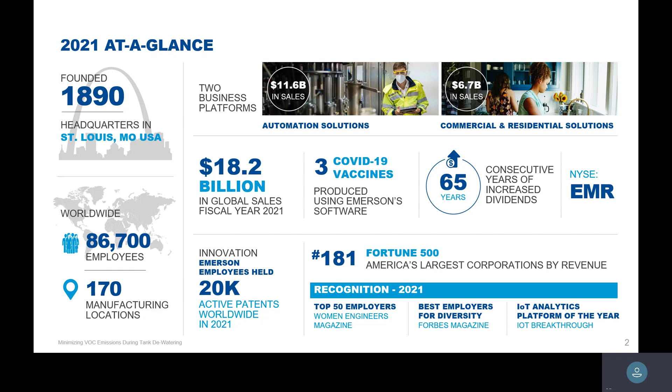So this has got a QR code, you get these slides if you want to go back. It's a real short clip, and it kind of gives you the idea of what we're focused on. The pillars we look at are greening of, greening by, and greening with. So it gives you an idea of who we are culturally, that's the goal here.

I wanted to include that because frequently in these cross-departmental engagements, I find that a room doesn't have a lot of knowledge of Emerson, when in fact your plants are probably very much full of Emerson content. It's just a different group of people that might be engaged at different times. So that's why the first couple of slides sit the way they are.

I'm Warren Merriman, business development manager for refining specifically, and my scope of responsibility is Canada and the United States. So roughly about 25 refineries across Canada and about 125 in the United States. Now, as we all know, those names change. Some become terminals, they move around a little bit, okay? They shut the doors on some, so they never pin down a number.

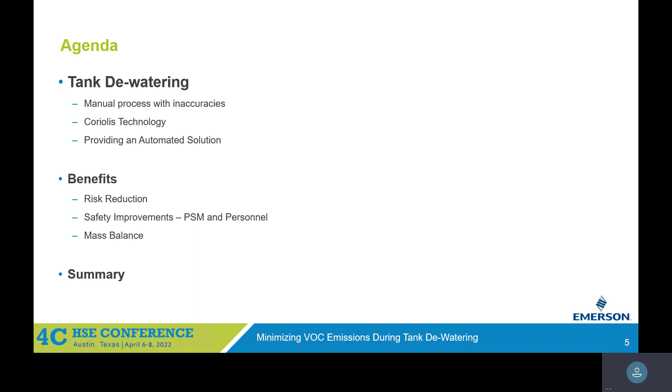And then we'll go over a little bit of the benefits, okay, and then we'll summarize real quick. So typically in the tank farm, we don't get a whole lot of investment. There are areas that have some risk and they get a lot of focus whenever an uh-oh happens. But there are some things that happen along the way that we need to be a little conscious of that might merit some investment, not only from a risk mitigation standpoint, but just from being a good corporate citizen taking care of the people there, and then the overall accounting within the facility tie-in as well.

So typically in a tank dewatering situation in a refinery space - and there are many more with regard to tanks, but I'll focus on that, that's the world we live in - you've got your storage tanks that are your hydrocarbon feedstocks, and we'll focus mainly on that while we're talking today. Then you have some intermediates, and then you have finished goods. As you go down that list, you also go down in the content of the water. So you're going to get most of your water up front when you're bringing your crude.

When you start processing and refining, that's your intermediates, you're going to start really getting rid of water. There's some ingress that happens, but you're reducing it a lot. And by the time you get to finished goods, I hope we're not shipping fuels with water.

That's why it kind of tiers down, and you'll see that the focus is really predominantly on the crude side as they're looking at the tank farm as a whole.

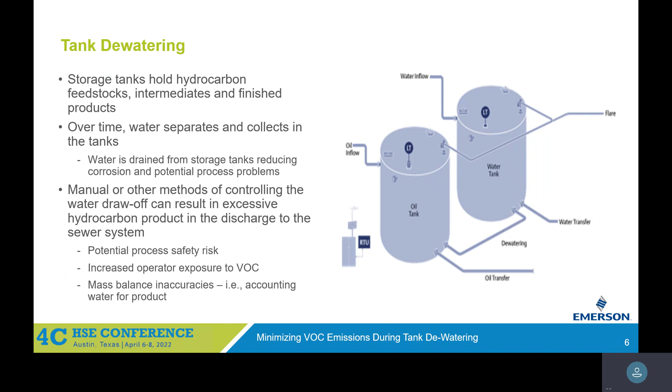So current operations, some of the challenges: you typically have got an operator going out manually until someone has found a reason to automate. I see a lot of them are still manual. It's not uncommon at all to see that someone's physically going out and pulling a draw, and there's just a valve there.

They're turning the valve until they think the water is gone, and then they close it out. Very common. And you get varying degrees of results depending on who the individual is that might be going out and doing it.

Now, this term here, naphtha, can you visualize what naphtha looks like? You ever seen naphtha in a glass jar? It's clear. Looks like water. Physically looks like water.

So when your operator goes out there and they have a piping that comes out and it drops into the drainage, they're frequently smelling for the hydrocarbon. Turn it on, don't smell anything. And all of a sudden I smell it, okay, close the valve. I've got to the bottom of the hydrocarbon, my water's gone, and I'm starting to flush out hydrocarbon. It's the olfactory, believe it or not.

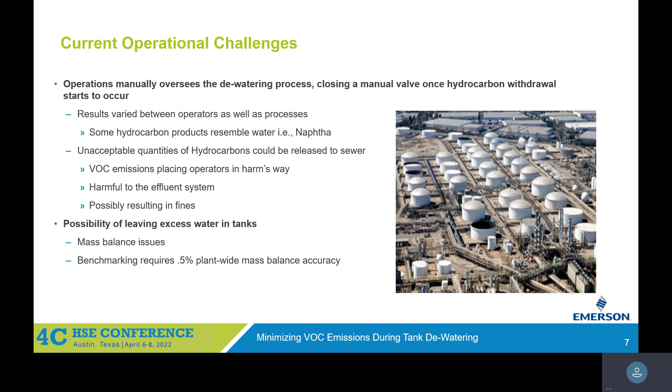So the solution that they came up with was, as you're looking at the tank, you have your overall oil that sits on the top, and then you have your water on the bottom, and this is where your draw might come out. Well, this little area right here of emulsion is where, when you have agitation, you don't have a good stratification or separation of the liquids.

So if I'm sitting here and I've got a manual valve and I'm waiting for some smells to change, I don't know if I've begun this or if I'm ending that in my tank. Okay. And I might get an increasing smell as I start working my way through the emulsion until I get a certain percentage or concentration that actually comes up and I smell it. But I'm physically looking at it if I'm standing there, right?

We talked a little bit about that risk. And I'm smelling for it. That's the gauge that you might see. So in the case that this client used, you look at this meter right here. It doesn't require any upstream or any downstream to be accurate. If you ever study flow measurement, those are some of the complications that you get whenever you're looking at the flow measurement technology solution.

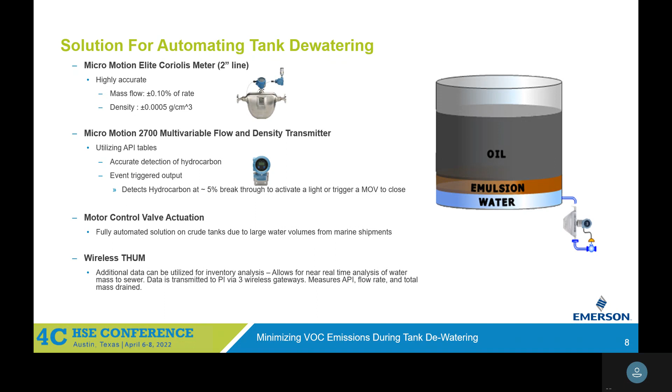Now, it may be hard to get an AFE approved and find the money to spend on your need, but in the greater good of what you're looking at, they're really not much. When you start cross-departmentally looking at the benefits, it becomes much easier for operations to say okay, this makes sense, because you're not coming at me with one solution. You're coming at me with a multitude of solutions, and that I will invest in. So just as you're thinking about the investment process.

So how does this little meter work? It's Coriolis, and you have the flow tube, as I mentioned before. So it comes in the flange, it moves through these tubes, and then out. That's how it physically works inside of the box that you can't see normally.

Then as you come over here with the transmitter, you have all these different outputs that you could get out of a transmitter. Normally your transmitter runs off a current signal, and you get one process variable. When you put a THUM and you include digital transformation, IIoT, or whatever it is that's allowing you access to money in your plants, okay.

This is how you instrument that to tie into all these other needs when you have a wireless infrastructure in your tank and you're limited to one wire of process variable information. You can open up all these other channels that serve different departments. It's very inexpensive to add a THUM to a meter and put in a wireless gateway, because home running all these tanks can be very costly to do.

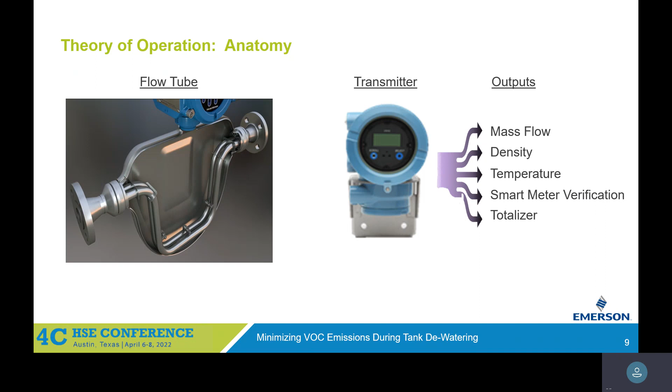Again, as you're trying to look through your value proposition. Now, physically inside of it, your flow came in. This is the cross section of that meter again. And as you come in, there are two tubes, one hidden behind the other because of the orientation.

There's an upstream tube sensor here, and a downstream tube sensor here. And then there's a coil drive that causes a vibration inside. Now they call these things micro motion meters—that's where it comes from. It's a really small, slight vibration happening inside, a physical motion that's occurring.

Now, during no flow conditions, the flow tube vibrates in phase—these two tubes, okay. So when you look at it on an oscilloscope, they're in phase. That's saying we're at our natural frequency that our coil drive is pushing, and we're just vibrating there at the same frequency. Now, when you run flow through them, you get a phase shift.

With flow, the Coriolis forces are induced, causing the flow tube to twist in opposition to each other. I like to say, how many times do you see a fireman standing with a nozzle with only one person? It's usually two, because the mass coming through that fire hose will take one person off their feet. That's the Coriolis effect—that's what's happening physically. So you take that down to a micro motion, and now you start seeing how we're using the physics.

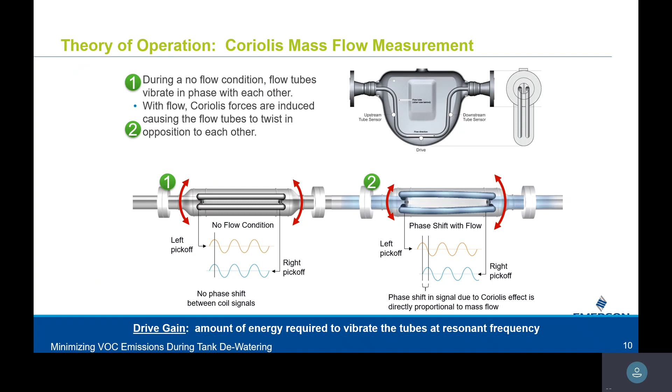That's generally how it works. A lot of people look at it as super complicated because they don't understand that's all that's happening inside. The way this particular client put together their calculations—because you have a variety of different tanks with a whole bunch of physical content in them—each has a different API gravity. Now you look these up on the internet and figure out what they are. There's tables and charts, and you don't have to do the math on this stuff. It's all been done by someone.

Probably API. So there's a correlating specific gravity for each of the API oils. In this case, this is their crude calculation. But what this man did was put together a chart where these were variable, and it automatically calculated these because he had tables behind it. Therefore, he could walk up to any tank with any content and solve for no more than 5% hydrocarbon breakthrough, regardless of what gravity or API of the process fluid was in the tanks.

And he just mapped the whole place for them.

So in this case, you would say, I'm going to have an API gravity of my crude that's 60, which is a corresponding specific gravity of 0.73. Then I'm going to look at my water, which has an API gravity of 10, which is specific gravity 1. And then I'm going to solve for only 5% hydrocarbon. So I take the 5 for my oil, and I get my 0.03. And then I take my 95 for my water, and I get a 0.95, and I add them together. And now I have my specific gravity.

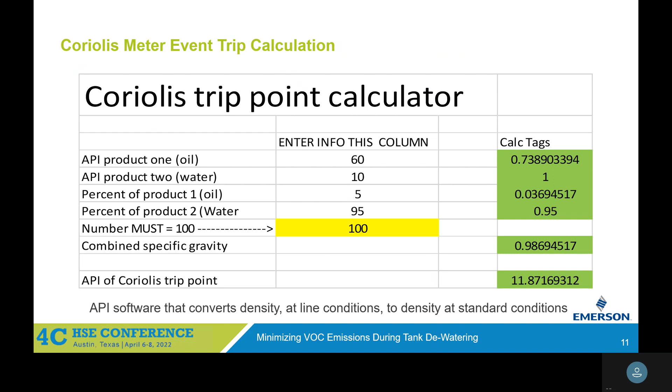Now, inside the transmitter, there is an API software that converts density at line conditions back to standard conditions. That's for the board operator, if that's of interest.

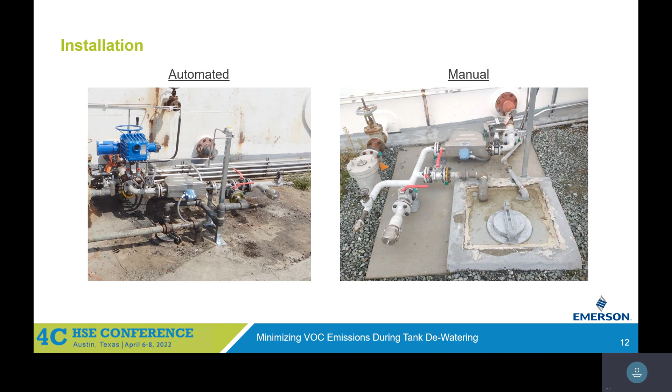As I look at a manual system, I might have this illuminating a light. So I couldn't afford, in the budget constraints given to me, to put these on all my tanks initially. But I still have someone coming out and I want them to have the same result. So I put the meter in, I have the meter illuminate a light, and now I can manually close it off. And I end up with the same business results from manual as I do an automated, and I can work my way through whatever constraints I have in my budget and still get the same. So we remove the variations between the process and the operations.

The result they ended up with, less than a gallon of hydrocarbon on every draw-off. That, to a person running a tank farm, is significant. I can't emphasize the result of that is large. I would challenge someone to go back and ask, what do you typically see? It will not be anywhere close to that. He was glowing as he was doing this presentation. That was significant. Now you eliminate your VOCs for the operator, and then as you're creating your overall VOCs across the plant, as we all know, we got to reduce those as good stewards in the industry and keep decreasing our carbon footprint. So we're protecting the person, we're protecting the environment as well.

So what was it, like a barrel before? To that gallon, you think it was that much? He wouldn't commit because of the variability from person to person, and because the person may be on the other side of the tank, and frankly, I don't think he wanted to admit that. But he was glowing at the result. I think it was maybe a little bit revealing when they finally got it down to realize what was happening. And it was all these situations or circumstances that caused that situation.

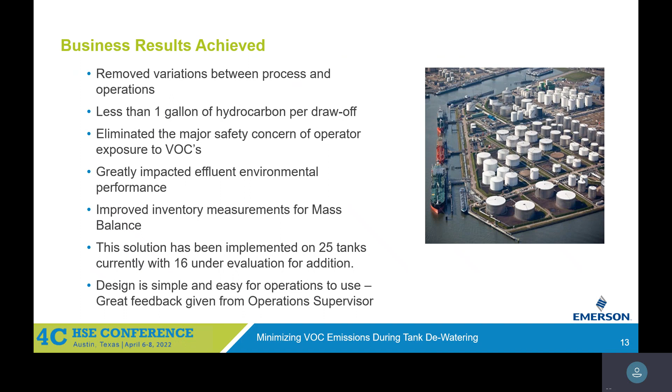And it's not unusual when I go out to a tank farm that I see that it's underinvested, because it's difficult to quantify an ROI in a tank farm. You can really quickly calculate when you're doing distilling or converting. It's super easy to do. But when you get to a tank farm, it's like, do I really need a new battery for my car, or can I make it? My tires are getting a little low, but it rained yesterday and I didn't have it. Maybe I can make it. Right? I mean, it's just one of those things in the tank farm.

And this is my last slide. I think the rest one is...